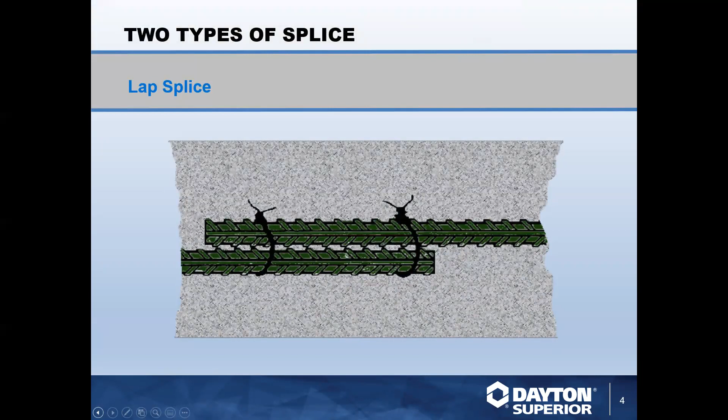So there's two types of splices. You have a lap splice and a mechanical splice. Lap splice is just short for overlap. You can either tie the bar or have the bar spaced out. The lap splicing length depends on the concrete strength, rebar size, and the spacing. There's a limit, however, and that's number 14 and 18 bar.

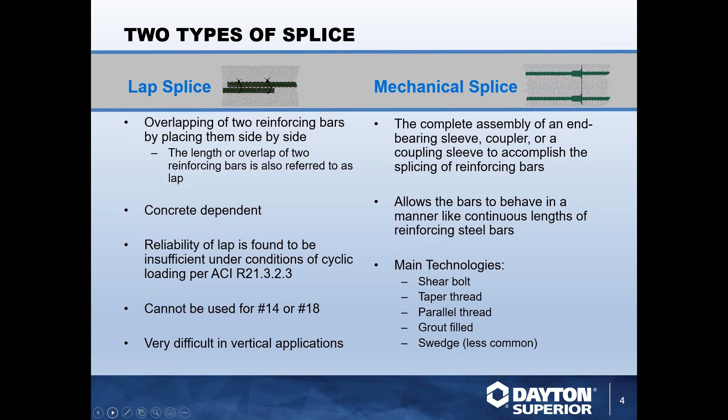So there's specific scenarios where you might be wasting large amounts of your rebar with a lap splice alone. Mechanical splicing allows for the rebar to act as a continuous length of bar, and there are many types of technologies to achieve that connection, many of which we here at Dayton Superior manufacture.

There are multiple reasons to use mechanical connections. You help avoid congestion and the forming of rock pockets. The strength of the splice has variables outside of the bar itself that determine its strength. Mechanical splices maintain their strength regardless of the concrete.

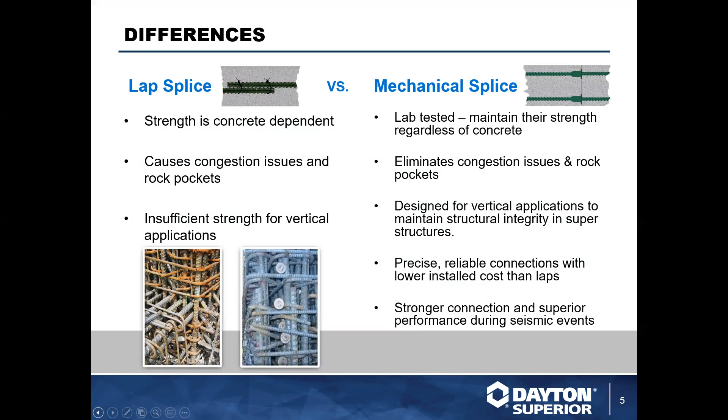Typically, it's an easier process than lap splicing. There's no need to measure the lap or make sure you're spacing the lap rebar correctly. It's also more reliable in seismic conditions too, due to the mechanical connection strength.

There's two types of mechanical splice ratings. You have Type 1, which achieves 125% of the yield strength, meaning the splice achieves about 25% additional strength past the point where the bar deforms. Type 2 just achieves 100% of its tensile strength. So as soon as the bar would break, that's basically the mode of failure. And here's just a list of our values for A615 and A706, two common bars.

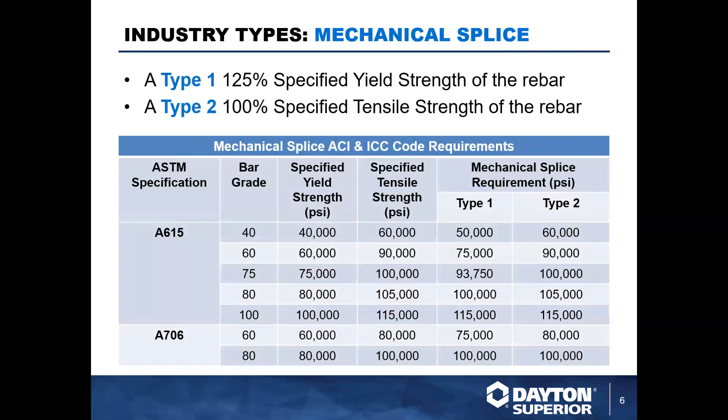The mechanical splice testing: we put our splicing products through a multitude of tests: cyclical, slip, tension and compression, and yield. Cyclical tests, you use that to see how the connection handles loading and unloading in tension. The slip test is to check plastic movement between the rebar and the splicing assembly.

The tension and compression test, usually the connection is tested at 125 to 150% of yield, and the yield and tensile test to see basically where the connection will max out.

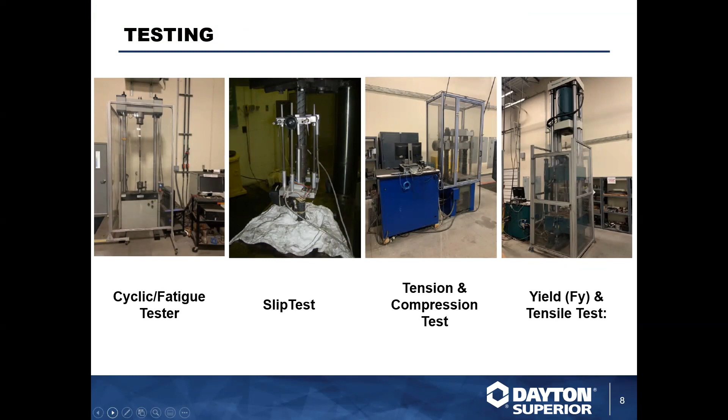Just here are a few of the agencies we associate ourselves with. ACI provides building standards for commercial and industrial projects. We're a corporate sustaining member with them. ASTM provides standards for products and services. Caltrans, typically most stringent on DOT requirements, that a lot of other DOTs base their testing on.

CRSI, their trade association, serving as an authoritative resource for information relative to steel reinforced concrete construction. We're another corporate sustaining member with them, and we participate in their regional chapters. ICC-ES, along with IAPMO, the two most universally recognized providers of technical evaluations of products, components, methods, and materials.

AASHTO, a lot of DOTs reference AASHTO requirements for their mechanical splices. PCI, we're a corporate member with them, and we've actually had a display at their convention. And as I already mentioned, IAPMO. And here is just an example of some of our IAPMO reports. We will provide those, and included in those, you actually see highlighted here the minimum torque required for our taper locks, which is just 5 foot-pounds.

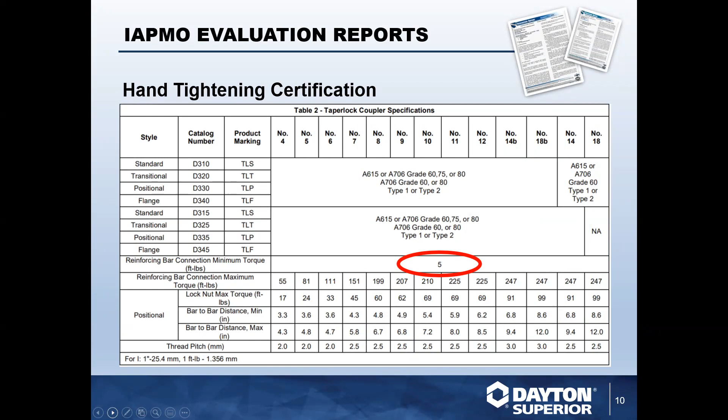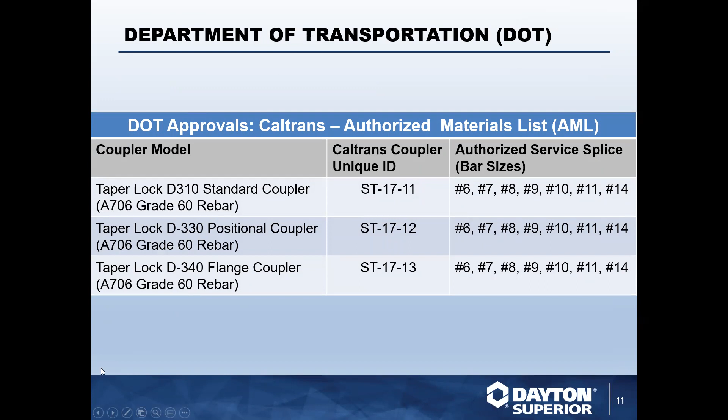And with that, I'm gonna hand this over to Mike Best. Go ahead, Mike. Oh, actually, I'm sorry, I forgot. Department of Transportation, Caltrans, I apologize. And here's just a list of our materials that we provide for Caltrans. Now I'm going to hand this over to Mike.

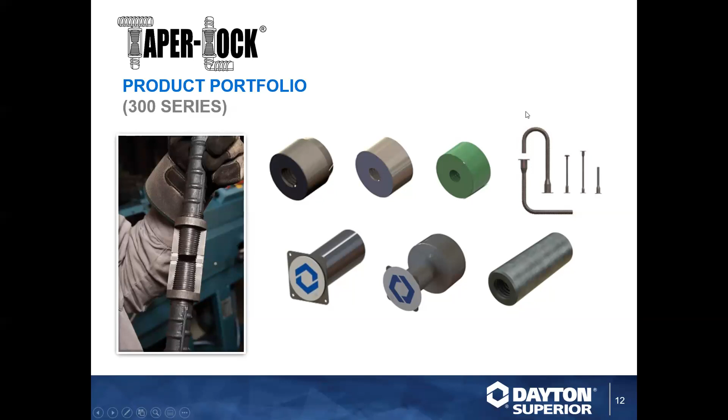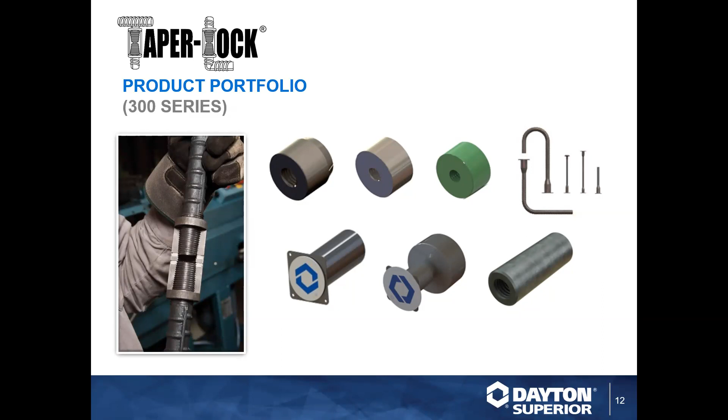Okay. Dayton Superior taper lock is a tapered threaded mechanical coupling system, hence the name taper lock. For a number of reasons, we are about 10 years late to the market with this product line. With that, there has been a plus and a minus. The minus is that our competitors have had a lot of time to establish their name in the marketplace.

The positive is that we were able to look at our competitors' product advantages and disadvantages. This allowed us to make a number of positive improvements. As a result, we are now taking significant market share because of our advantages.

Okay, having troubles getting this to move. Did it get shifted over? Yes, it should have. Let me make sure here. I'll move it as I try to fix that for you, okay? Okay, thank you. You're welcome.

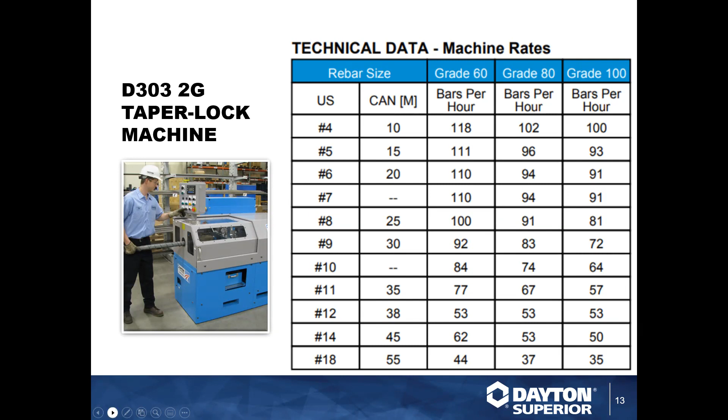You can shift to the next slide. I can, but go ahead and try it. You should have the ability. Bottom left with the arrow there. Yeah. Perfect. There we go.

Okay, good job. Taper threaded mechanical couplers across the United States are pretty much the most popular splicing system. Of course, there are exceptions out there, but in general, they're fairly easy to install, especially when compared to parallel threading systems. This is true with our competitors as well as with ours. The difference is that we have a proprietary thread pitch. Dayton's competitors have a greater angle on their tapered threads. As a result, in vibratory conditions, such as a seismic event, the competitors' couplers take fewer rotations to fail. Now, realistically, the odds of this happening are very low.

However, the reason I mention this is that our product development team and engineers live a culture that always focuses in on all the details and tries to make improvements even to the smallest of things. So when you add up all the minor improvements like a water-based coolant, you end up with a much better product. As you can see in the slide, taper lock couplers work with all rebar sizes, 4 through 18. They are available in plain, galvanized, epoxy, stainless steel, ChromX, and can be used with grade 60 through grade 100 bar.

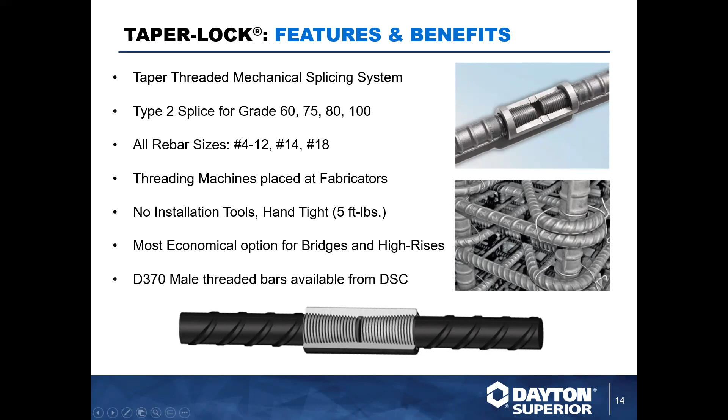Oh boy, I screwed up here. I forgot to move this forward. Okay, sorry.

So the D360, which is our weldable coupler, has beveled edges so that it can be easily welded to structural steel.

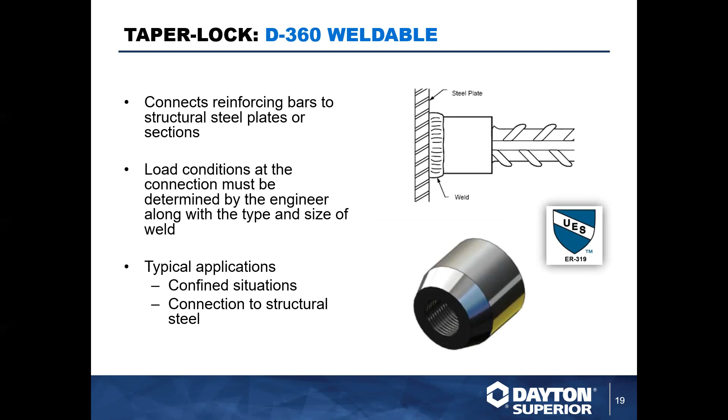The D351 and 350s, these are our end anchors. They are used to help prevent congestion and to eliminate hooked bars. The images on the slide are of the JP Morgan Chase construction project in New York. They decided to go with our taper lock couplers and end anchors because of the hand tightening feature.

The images on this slide show examples of the amount of grade 100 rebar used on the 60-story project. If you were an installer, can you just imagine having to use a torque wrench in these tight areas? The contractor has raved that they are saving a crazy amount of labor hours due to the hand tightening feature of these couplers.

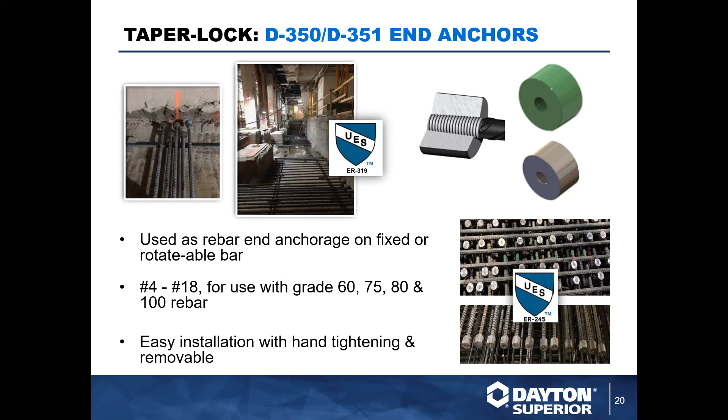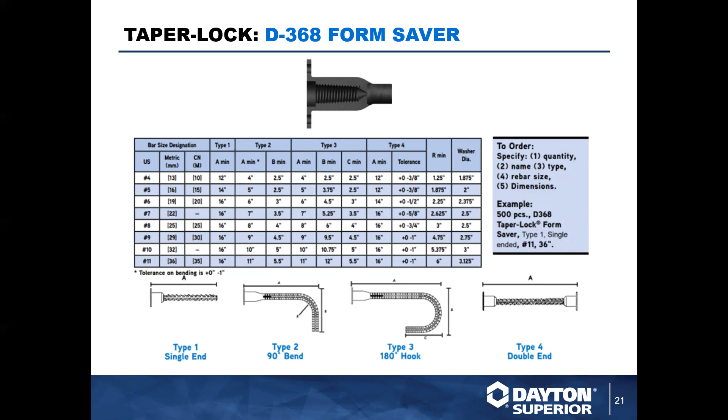Let's see. This is our D368 form saver. It's basically, oh gosh, my mind just went blank. It's a forged end flanging coupler from the end of the rebar and has tapered female threads. It's available in sizes 4 through 11.

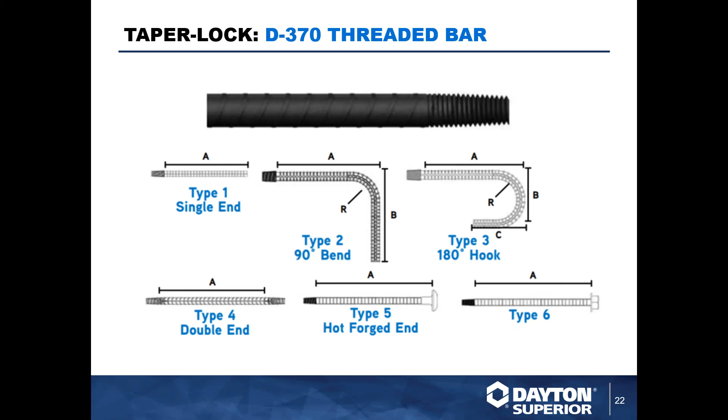The D370 is our threaded reinforcing bar, which is available in single-ended, double-ended, bent, hooked-ended, and custom configurations. Typically, customers that do not have our threading machine will use this product. This is just for a review. These are our family of taper lock products that we just covered.

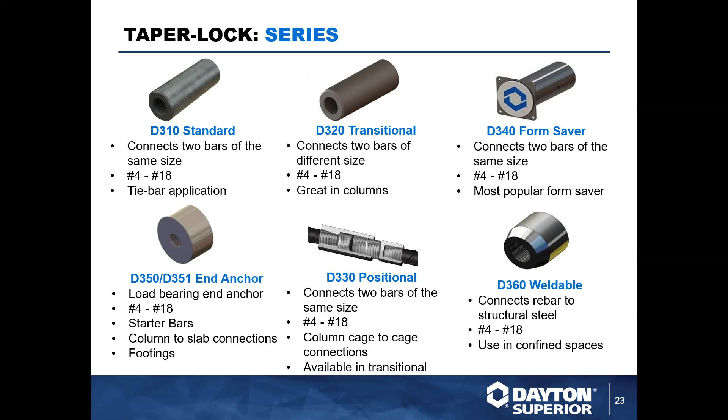So why choose taper lock? We've talked about Dayton's threading machine being fully automated with faster throughputs. We also use a water-based coolant instead of an oil-based coolant. What we did not talk about was that Dayton's threading machine is fully enclosed for safety and has a computer-operated system.

Our machine has longer chaser life than our competitors, about 3 times the life. Also, changing out the chasers takes about 10 minutes. I have been told that to change out our competitors' chasers, their machines take anywhere from 20 to 40 minutes, depending on the operator.

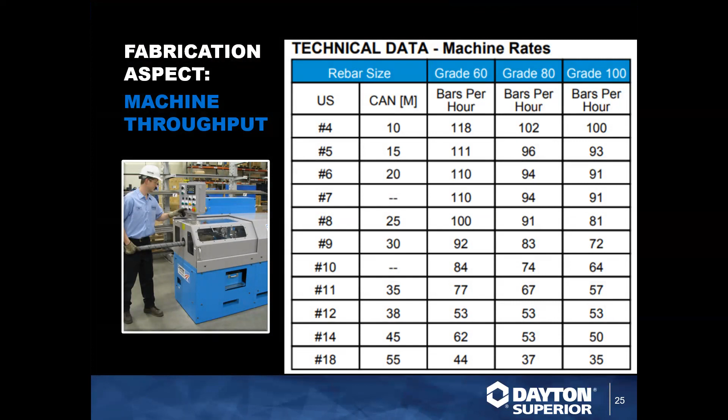We also did not talk about pricing. Our competitors do not offer an import version of their threaded couplers. Dayton Superior threaded couplers and end anchors have an import version. The specifications are exactly the same and have the same tested approvals as our domestic made taper locks. Our domestic taper locks for American requirements or American made requirements are competitively priced.

Our import version, for commercial work, is 20 to 30% cheaper, depending on the size of the coupler or end anchor. Thus, this option is at least 20 to 30% cheaper than our competitors. Using the taper lock imports enables our customers to lower their project bids if they really want a project, or they can bid with market pricing to improve their margins. Most of our customers prefer getting better margins.

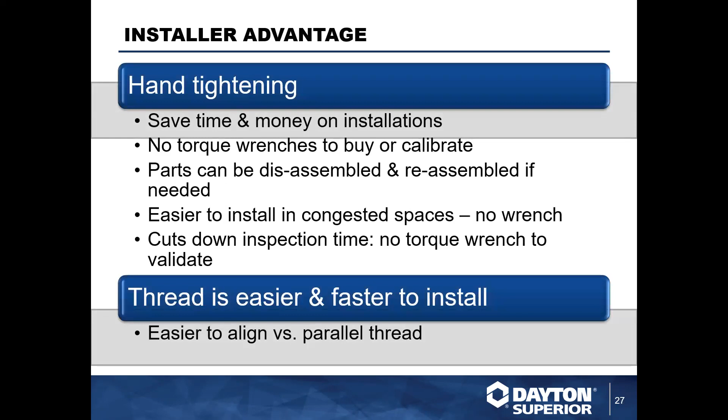And then, as stated before, the taper lock thread pitch is not as great as our competitors, which means it will stay engaged longer under vibratory conditions. More importantly, it enables our customer to hand tighten couplers versus having to use a torque wrench. Again, we have been late to the market, but because of our advantages, we are taking market share over the last couple of years.

Thank you so much, Mike. So now we're going to talk about a brief overview of Build America, Buy America, and Sarah Clark is going to talk us through that really quick.

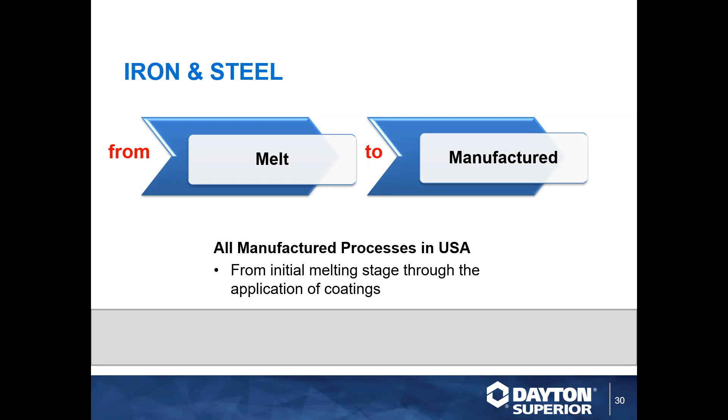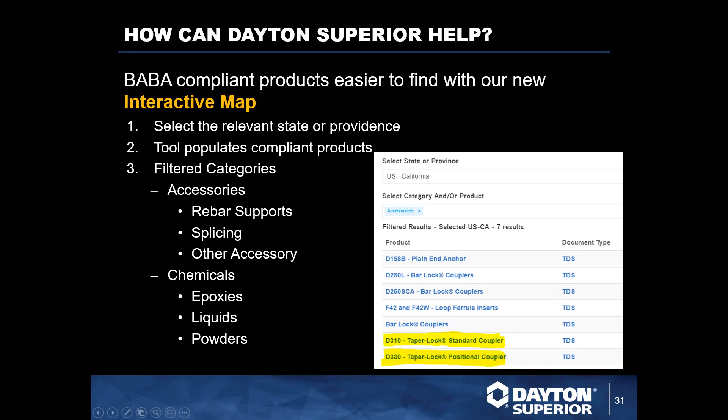So how can Dayton Superior help? Oh, I'm excited to learn how. All right, so we have a new interactive map that is located on our website, www.daytonsuperior.com. So all you have to do is select a relevant state or province. The tool will populate the products. You can filter the products by category. If you're looking for accessories, we can go hit the splicing, and it'll tell you all the splicing things that are BABA compliant or DOT approved.

All right, we have a landing page where this is located. The BABA landing page has all the products that are DOT approved. However, if you go to the map and you don't see a product that is approved in that state, please contact customer service, because it still may be BABA compliant. It may just not have DOT approval, or it may not have a category to be DOT approved, but it may meet the specs.

I have a serious question for you. When you say BABA, do you feel like a lamb? Sometimes. Okay. Okay. Build America, Buy America.

Contact customer service, and we will be happy to help you. We've been getting lots of requests for certificates of compliance for Build America, Buy America. Contact customer service again, and we'll be happy to write a certificate of compliance or BABA compliance for relevant products.

And then we have citations. All of these citations, all of these documents are located at the Build America, Buy America landing page on our website. Heidi will make sure you get that link, and you can see all of the things that I've referenced today. And please look for information on your own as well. There's a lot of information out there, and enjoy. Yeah, thank you. Take it over.

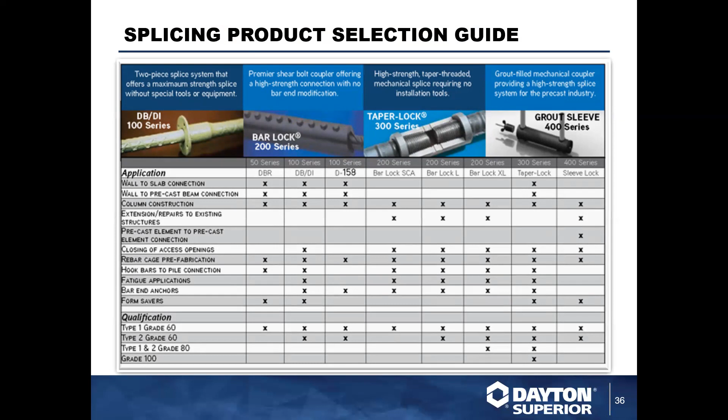So, you know, you see what's going on here, but then you can actually figure out what you truly need for your company. So what you're looking at is a splicing product selection guide. This is a great guide that helps you understand the application that you need, the different type of rebar series that's used, and the different types that we have. You know, we're talking about taper lock today, but we also have DBDI, bar lock, grout sleeve systems in our splicing portfolio. So this can be found on the DaytonSuperior.com website and is very handy for figuring that out.

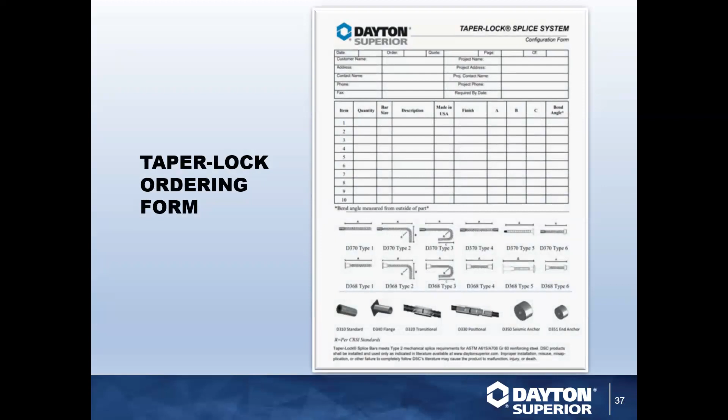In addition, we have a taper lock order form, since we're discussing that product today, and you can put your order in as well, and that is found on DaytonSuperior.com. Guess what? We've got some more. So you want to know about all these products that Mike talked through. Maybe there was a D320 that, the page didn't turn and you were really interested. Well, guess what? We've got that information out there for you.

So you can just search in the search bar. If you see my mouse, there's the search bar, and I don't think you can, but on the bottom right image, you see the search. Just put in D320. And up will come, in this case, you see the D340 product page. It has the technical data sheets I was yakking about in the beginning. There's one as an example, as well as any handbooks.

We have the rebar splicing handbook that will go over all of the products. We have the IAPMO reports for the ER319 and the 245, so you can review those as well and get them out to your customers if need be.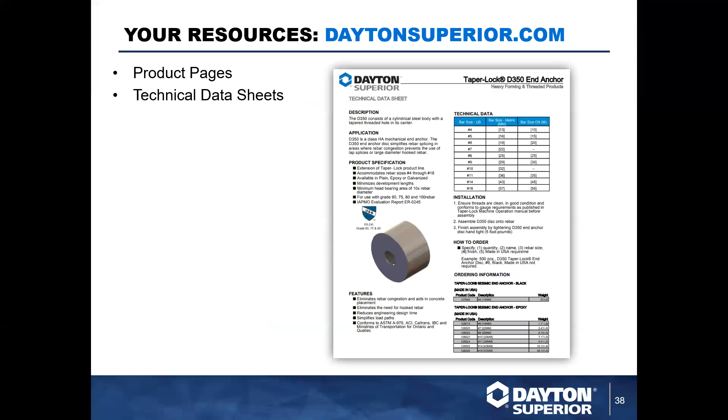Last call for questions. Oh, I see the question that he actually had, and maybe this is more for Manny and Mike, he was looking for the identification on the coupler. Is that put on the coupler, made in the USA, guys? Do you happen to know? Yes. It is? It's stamped on the couplers. I think we have an image on that, but yeah, there you have it. Any other questions? And you're welcome. All right. Well, if I can find an image, I'll stick it in the email for us.